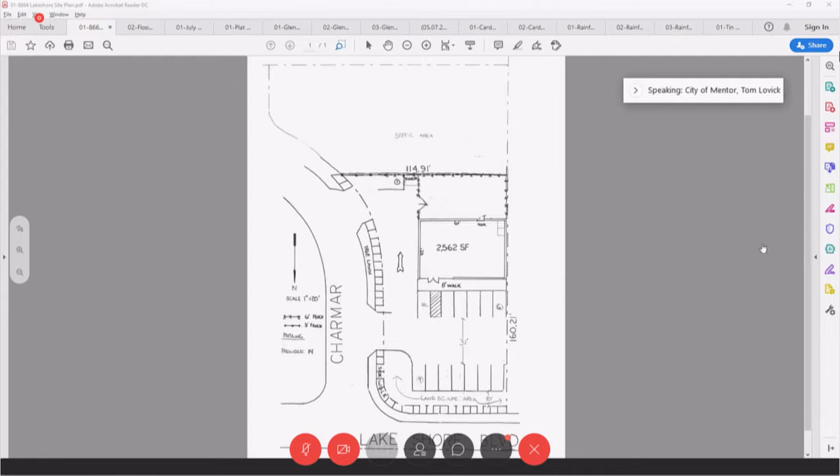Okay, so you won't be storing anything there. No, not at this time. I have no plans for that. Okay, is it part of your rental agreement? Is that part of what you're renting? Yes.

Kathy, anything from the city? Mr. Chairman, nothing other than what was noted in the report in the list of conditions. Now, you've read the staff report, do you have any questions on the conditions that are listed there? I do not. So you agree with all those? At this point, yes, I do.

Entertain a motion from the commission. Motion to approve with the 5 conditions. Second. Mr. Cook. Yes. Mr. Haddon. Mr. Perkovich. Yes. Mr. Thiedemann. Yes. Mr. Varga. Yes. Mr. Cicero. Yes. Mr. Snow. Yes.

Second conditional use permit to allow a temporary event, July 4th parade at 9096 Lake Overlook. Is that applicant here, Larry? I did not see him, but I'll look again.

Mr. Parks, if you are a call-in user, can you put your name in the Q&A? Yes. According to Mr. Murphy here, he did submit something. I did not receive it, or if I did, I did not catch it, but he's requesting it tabled.

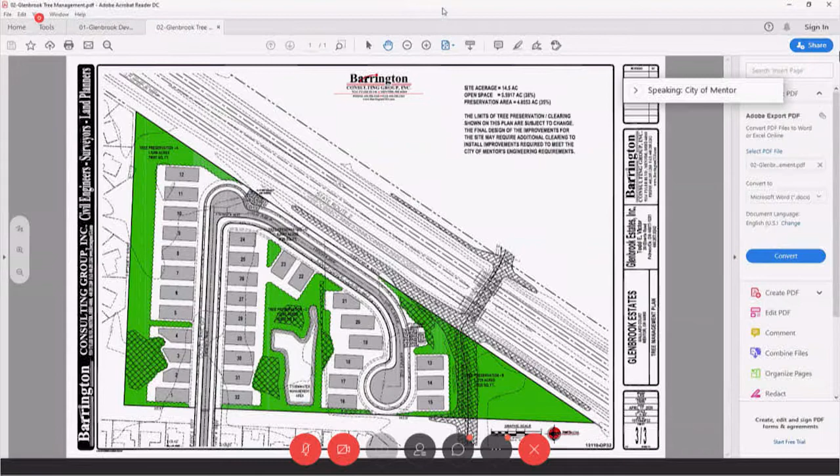Mr. Novak, I have a question. Are we stuck with those house styles that you proposed, or can we look at other house styles in there? Let me tell you why I'm asking that question. It seems to be they're awfully garage-centered home styles, and I just think we ought to look at perhaps another style of home in there.

Is that possible? We could surely take a look at a different home style, and I could appreciate your comment, but the way you have to think about this is that the building envelopes here are 40 feet wide. There are some that are a little larger than that, but primarily they're 40 feet wide. So if you take a 40-foot wide house and you put a 2-car garage on that house, that garage is going to be somewhere around 22 feet wide. So it doesn't leave you a lot of room, you have a front door and a window or something there. So the home style is limited, but we could surely look at some alternatives, but I'm not sure that we could get away from that garage heavy look that you're describing to me.

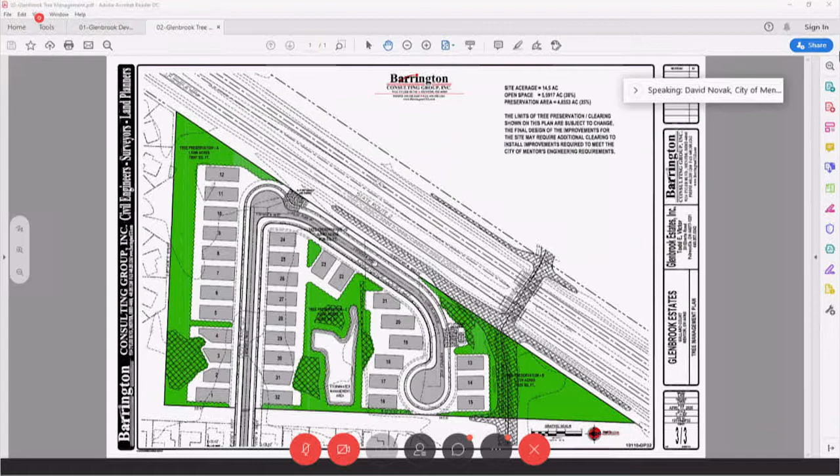Okay. How about if the envelope was a little bit bigger? Would that satisfy you? Well, if the envelope was bigger, it would surely help, but I guess my question would be, it's our opinion that we can't go any less than 32 units.

So if 32 units is where we stay, then the only other option would be to reduce the distance between units. And if the fire department or whomever would be concerned about that, if we went down to 15 feet, that would surely help. But again, I'm not sure who would make that decision, but it has been my understanding that the Planning Commission has looked at this 19 feet or 18 and a half feet from gutter to gutter, which is what's been used recently in the city of Mentor when there's been rezoning to the RVG.

Commission members, any questions? Mr. Chairman, Mr. Varga. I had advised or requested that there be some access to the property, to the southern corner of this property, for the use of the residents. I don't see anything that alludes to that. Could you speak to that?

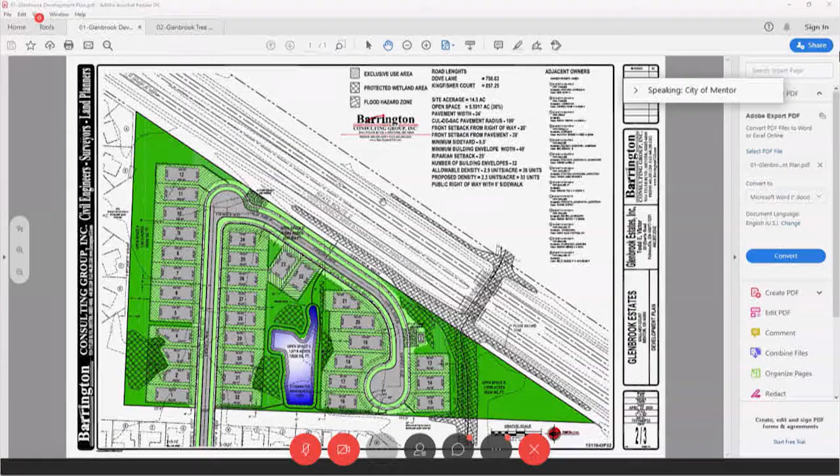Mr. Chairman, we discussed this with the administration, the engineering department, the fire department, the city manager's office, and the building department. Our chief building official also oversees the flood hazard zone areas. Everyone agreed they did not want to see that stream crossed in any way. They don't think it's a safe means of access, and that keeping the open space preserved in its natural state is just as appropriate and will meet the open space standard. And for the folks that want to see the trees saved, it's another way of just leaving it in its natural state.

Mr. Chairman, I'll just state my opinion, and that is that one of the justifications for common open space is for the enjoyment of the residents. And if they can't have access to it, it no longer justifies the move to RVG.

Okay, any other comments, questions for the applicant? Well, again, Mr. Chairman, we're not opposed to putting some type of... let me put it this way. Just because we don't have a walking trail or some simple means of access across that creek, that does not mean people cannot use it.

But again, if the commission wants to add a ninth stipulation that we put a walking trail back to that triangular piece at the southern part of the property, if the staff and engineering and everybody else is okay with it, we'd be willing to do that. Well, I'm going to guess that they're not okay with it because of the letter, the comments that Kathy just made. Right? Correct. Thank you.

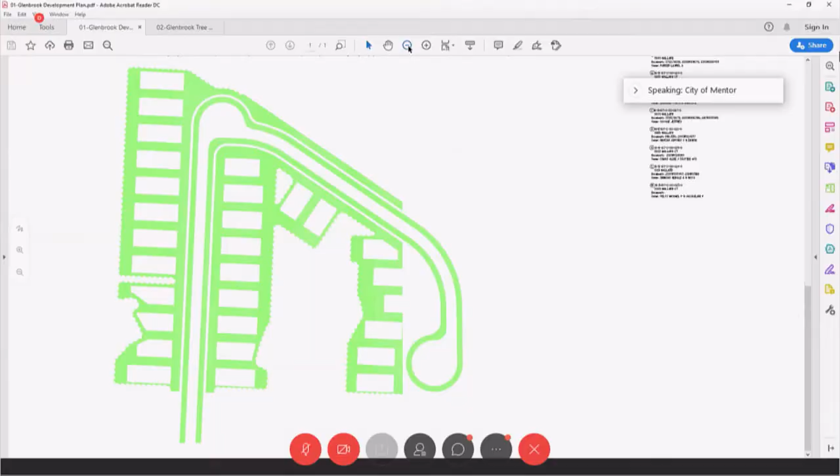But again, if we're looking at that walking trail and you put the mail kiosk there with a few parking spaces, then if somebody near the beginning of the development wanted to drive their car over there and park so they could walk through that path, that may be an advantage. But then you're in the backyard of 21 and up tight against 22 — there's no privacy for those two lots. By moving that, it gives you more problems. And the city engineer is the one that commented on moving it.

Mr. Novak, comments? Again, as far as the number of units, we can't go any lower. We're more than willing to relocate this mailbox kiosk somewhere that makes the administration and the planning commission happy, but I'm not sure where else we can move it.

Let me ask you another question. Let me get back to the envelope, layout of the buildings. If you reduce 22 and 23, could you reconfigure anything else in there so that you could change the building envelope to accommodate a different style house? Ask me that again, I'm sorry. I said, if you got rid of 22 and 23, could you reconfigure anything else so that you could increase the size of the building envelope, so you can change the style of the house going in?

It would be my opinion that on Dove Lane, that would have no impact on the homes along Dove Lane. Those two lots, 22 and 23, as we show them on our plan, are 45 feet wide. We could surely take those down to 40 feet, which would allow a little more room between 21 and 22. So you would pick up another 10 feet.

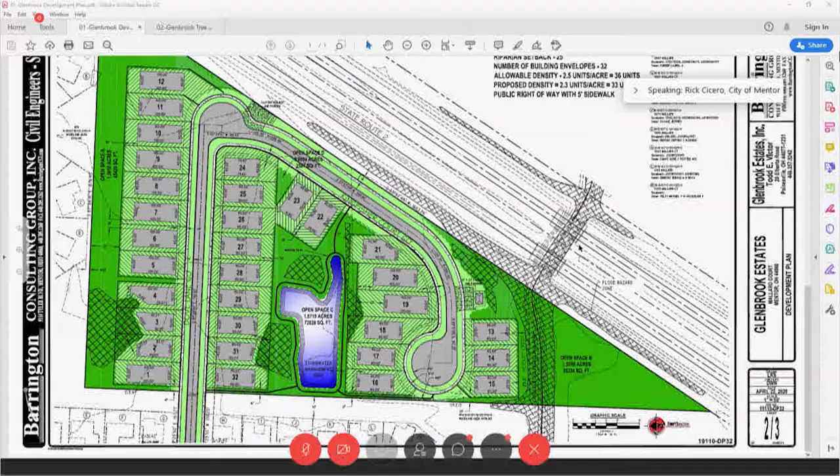Mr. Chair? Yes. I just want a couple comments to Mr. Novak. The problem is the same problem I think I said last meeting. There's too many homes. There truly is a path to RVG here, however the path is not to maximize the number of homes. Now we just came up with another issue where the point Mr. Varga was making, part of the area considered open space isn't accessible to the people that live there. Every problem we come up with is because of the number of homes. You stated you have to have 32 homes for it financially to work. It makes me believe it's just not a viable project then.

Respectfully, I don't agree. Again, the zoning allows for 36. We've gone down to 32. We've tried to reconfigure this layout to accommodate the planning commission's wishes, but you also have to understand that there are also some needs or things that we need to be able to accomplish to make this project work.

I do understand that you have a unique size plot here, and I do not believe it's the type of plot where you maximize or go 4 homes less than the 36 to make RVG work here. It just is too crowded, and every comment we come up with, really the core problem is there's too many homes.

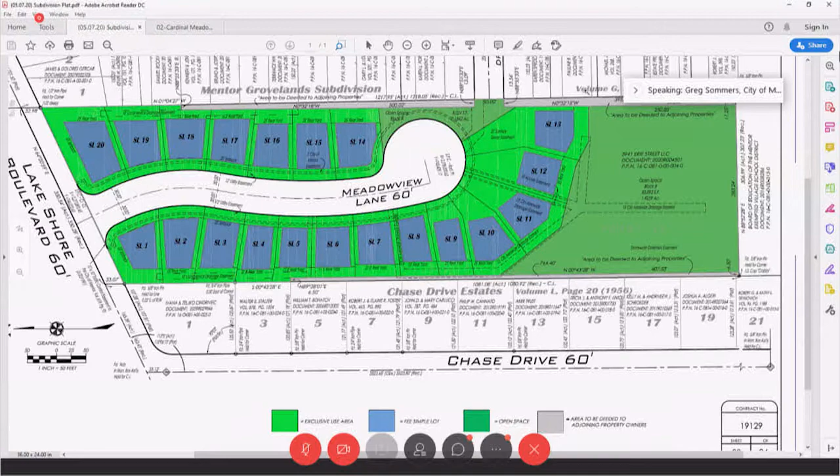Regarding Cardinal Meadow subdivision, here for final approval tonight. We spoke with Kathy and John regarding some modifications made with the new change in the RVG. There are new setbacks we had to deal with, but that's attributed to giving the neighbors the property and resolving those issues. The quality of the open space, the pavilion Mr. Cook requested, is going to be there. We think the plan looks good, and we've worked with all the neighbors to get through the challenges with encroachment, and we'd like to proceed.

Open to questions. Kathy, any comments from the administration?

Thank you, Mr. Chairman. One item in particular is condition number 5, the minimum rear setback established on the preliminary plan approved with the rezone. It was originally approved at 25 feet. At the time of preliminary plan approval, the strips of land now shown in gray, identified as areas to be deeded to the adjoining property owners, were not shown on the preliminary. These areas are the areas of existing encroachments. Mr. Sommers has been working with the adjoining property owners to resolve this, and what they've concluded is they want to deed the property over. As a result, certain units are left with a shorter rear setback. So I think if the commission would like to move forward, item number 5 needs to be adjusted to allow reductions in the rear setbacks for those units that abut the areas of land being deeded over to the adjoining property owners.

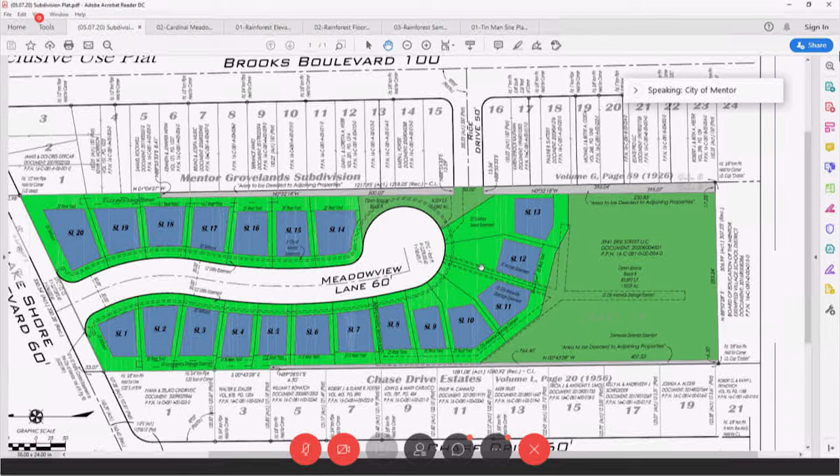Absolutely. I only have one other suggestion, and I don't know if you want to make it part of that number 11 condition. After 12 has been rotated, I'd like you to move the pavilion slightly to the west so that when 12 looks straight out of their property, it's not in their line of sight, and it doesn't move into number 11's line of sight. You understand what I mean? Yes, no problem at all.

We're planning on incorporating some mounding between or behind those properties, so they have complete privacy with some of the basement excavations. So we'd be glad to make that a condition. Yeah, but just slide it slightly to the west, not a big move, but just so it's not in the direct line of sight out of the back of site number 12. Completely agree. Okay, thank you.

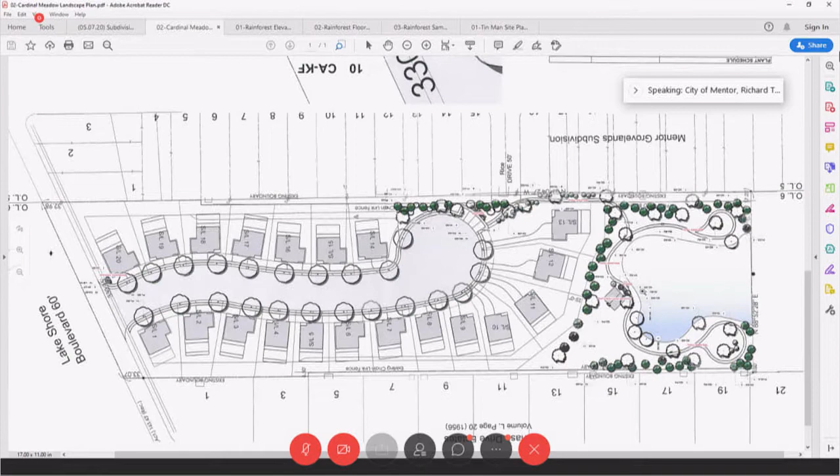Thank you. Entertain a motion. Motion to approve with the Chairman. Point of order, I don't think we untabled this yet. Do we need to untable it first?

That sounds good. And Mr. Varga's comment is a slight modification to condition 11.

Second. Roll call: Mr. Cook, yes. Mr. Haddon, yes. Mr. Perkovich, yes. Mr. Tiedemann, yes. Mr. Varga, yes. Mr. Cicero, yes. Mr. Snow.

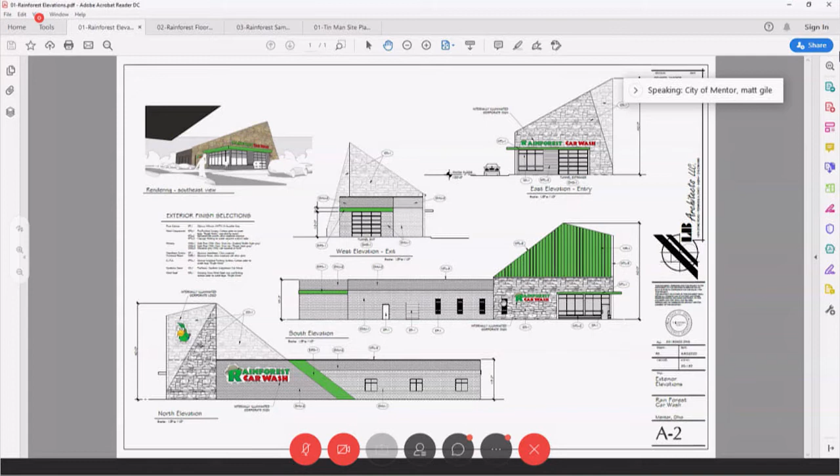Don't have any bowling pins or anything, do you? No.

Easy, okay. Commissioners, any questions for the applicant? Hearing none, I'll entertain a motion. Motion to approve. Go ahead, Rick. Motion to approve with the 3 conditions. Second?

Mr. Cook? Yes. Mr. Hadden? Yes. Mr. Perkovich? Yes. Mr. Thiedemann? Yes. Mr. Varga? Yes. Mr. Cicero? Yes. Mr. Snow? Yes.

Okay, Matt, you're aware that you have to go before the sign group, correct? Correct. Thank you.

Number 8, Rick Osborne Jr. for Yellow Brick Storage. Rick, you still here? I am.

Thank you for hearing me tonight on this lot split that Yellow Brick Storage is requesting. I'd like to share a little of the history of what we've been working on. It's no secret we've been working with Aqua Ohio to relocate to this location. When I built Tin Man Road back in the early 2000s, we had an agreement with the city to have this pond installed at the southern terminus of Tin Man to help accommodate water from the south, as well as water needs for our site here.

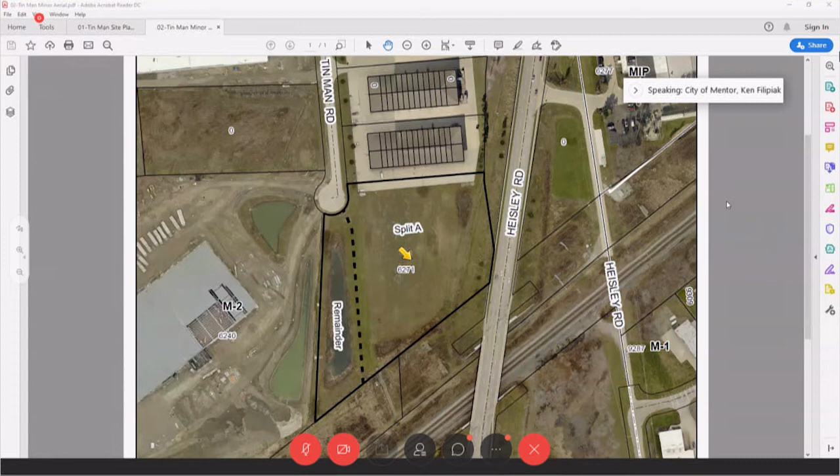Ken, are you there? I am here. Thank you, members of the commission, Mr. Chairman. I would stress this evening that the city would be opposed to the lot split for a number of reasons. We took a close look at the history of this, and the construction of the detention facility proceeded no differently than most projects we would do today. It was a requirement at the time to allow for the construction of Tin Man. It was intended then and continues today to capture the flow contained on that site. The exact language from the 2000 approval said that if needed, the construction of the detention facility shall be part of the improvement plan, which it was.

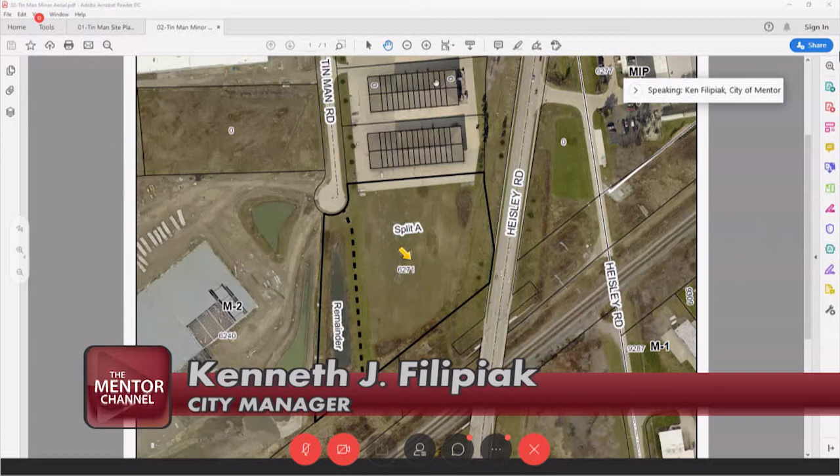Our concern is that if it's separated from the main parcel, it will become an orphan parcel. Essentially, if it goes delinquent at some point, it would have no development value and no value to anyone else going forward. It would probably end up without someone to take care of the property, and that's not something the city is interested in inheriting.

I would also point out, this may be a moot point, that we had discussions as recently as today with representatives from Aqua Ohio, who indicated they no longer have an interest in this property for development. So this may be a moot point.

Okay. Rick, I have a question for you. Yes, sir. The lot split is in violation of three statutes in the code of the city of Mentor. How do we reconcile that? Well, I don't think you can.

I think to create a nice parcel for someone to come to the city and put a new business or property or a new building on, you sometimes need to make some types of variances like that, especially at the end of a cul-de-sac like this. It's hard to get every parcel right. I think the acreage allows you to do that and to approve that.

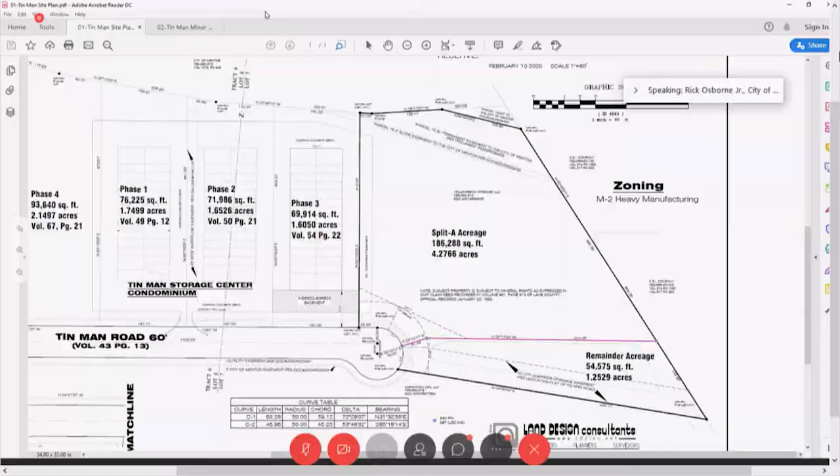I guess I'm still at a quandary about why I'm in violation of three statutes in the city of Mentor with this split. I don't have any other excuses other than what I stated.

Okay, commissioners, questions for the applicant? Just one question, I think it was answered, but I want it for my own clarification. Why split it? Why is this parcel less desirable in terms of its utility to a tenant or a new owner with it broken out like this, subdivided? Why is this necessary?

I think I could answer that, but in general it's primarily because they don't want the responsibility of having to maintain the pond if they ever were to have to maintain it or do anything with it. And so they don't know that unknown, and any buyer is not going to realize that unknown. So it's hard for someone to buy something like that without knowing what that cost might be. That's the primary reason.

I have a follow-up question with the city. It's theoretical, so no one can be held to the answer. My question would be, if that lot was developed, could they also use that detention basin for their own use? Yes. Okay, so that would actually be an advantage. It is. Right. Thank you.